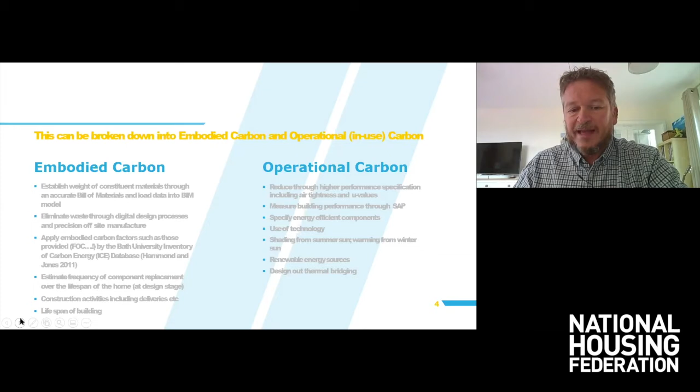These are net zero carbon in both embodied and operational terms, to be a whole life carbon positive and energy positive with zero waste project. The carbon positive is to be achieved within 15 years, to provide a cost neutral solution to sustainability, and to provide zero waste in construction. And the next slide, please.

There are lots of well-considered resources available to help. RICS have published a methodology for assessing whole life carbon, which can be used with your consultants. Now the next, please. The RIBA 2030 challenge, which I mentioned earlier, is a document with lots of advice. It can be used by you and your consultants, and it's strongly advised that it's used very early in the process from RIBA stage 0, as mentioned previously.

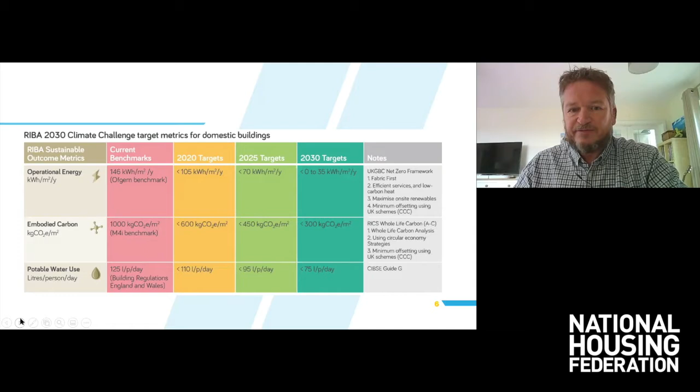The next slide, please. So the UK Green Building Council has a definition that fits perfectly with MMC methodology of design for manufacture, assembly, and I add disassembly in there, and that's where the circular economy comes in. It's when the amount of carbon emissions associated with a building's embodied and operational impacts over the life of the building, including its disposal, are zero or negative. That's the UK Green Building Council definition.

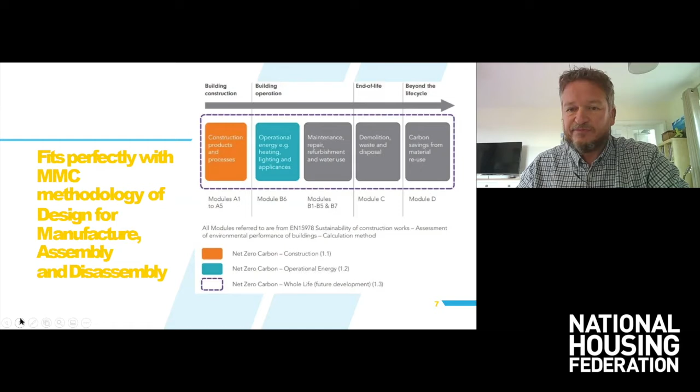If an airtight house is the option chosen for delivering new homes, then there must be an MVHR system. This control of ventilation is vital to maintain healthy air quality. However, it brings in some issues, and for example, relying on residents to manage the maintenance of the system is perhaps unrealistic. So companies such as Etopia have worked with partners to develop smart technology which will automatically send information about the system to asset owners. This informs part of the scheduled maintenance regime and eliminates costly unscheduled maintenance visits to identify the issue and then go back and fix it.

Other ways technology provides a tangible benefit is to control the ambient heat in the home through monitoring and then evaluating the best solution to resolve issues, such as solar gain, by operating smart blinds on the window. And the next slide, please.

There are numerous reports on achieving best value through different procurement models, including the excellent Procuring for Value from the Construction Leadership Council. This particular report was published in 2018, and many others over the past 30 years have repeatedly stated that lowest cost is not the only metric. There should be a balance of key performance metrics.

At AnyOffSite, we help you see the benefits of early engagement. I hope you can see what I've done there. The social benefits of the project and design and proposal. The economic benefits of the design. This includes methods of aggregating demand, such as Building Better or being part of the National Housing Federation. Then look at the environmental benefits of the proposed design.

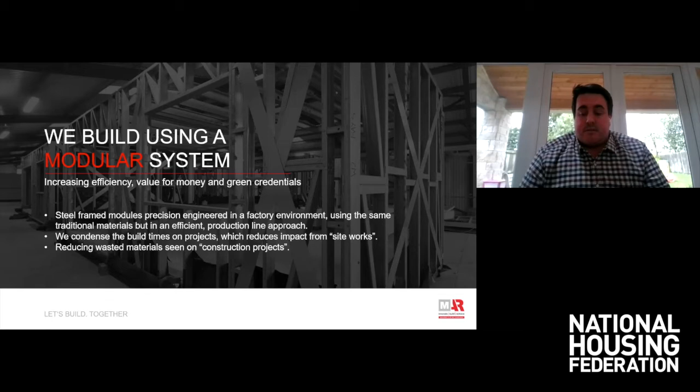We are commonly working within the market sector to reduce wasted materials, wasted labour, wasted effort, and that's something that's quite synonymously seen on some construction projects where some of our techniques are not developed and constructed. So we feel that the push towards a more sustainable future requires quite a sizable change in attitude, and that's something that we are now starting to see coming to the fore more and more year by year.

The built environment plays such a pivotal part in all of our lives. There's not one person in the world who's not touched and changed by the built environment, and sustainability needs to be at the forefront of what we're doing. Many local authorities, registered providers, and even private enterprises and PLCs have established quite large net zero campaigns, many of whom have also mandated climate emergencies.

And we feel that there's a real almost feel of carbon guilt within the marketplace and in general consumer behaviour, where everyone is a little bit more concerned, particularly over the last few years, as to the legacy that we're going to leave for future generations. The tide has truly turned. The UK government is backing increased targets for both housing supply and carbon credentials, and those things need to come together hand in hand. It's not a solution that can provide an answer to only one of those challenges.

And we've got to remember as well that affordable housing stock remains a key part of the social economic fabric of the country too. Truly affordable housing has to be linked to wages and growth, and we need to try and find ways as a construction industry to deliver more at scale to bring those barriers down. And obviously the way we are living and working in the built environment is changing. The last 6 to 9 months have been quite a seismic shift in how we are all spending our time, where we're spending it, and what we're doing in the built environment.

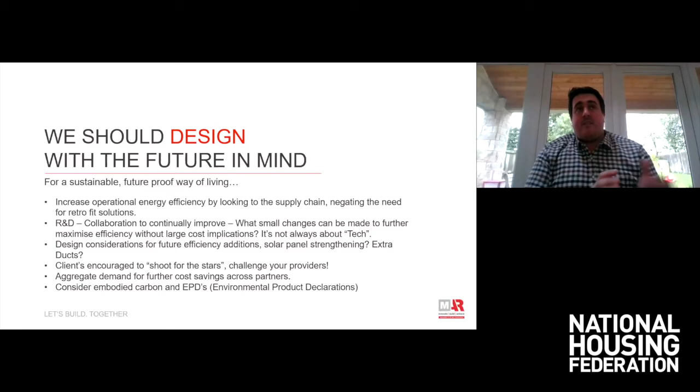And I feel that this is an area of MMC which is going to really take off in the next couple of years, when we start talking about not aggregation of separate products, but physically getting common and firm data about the environmental product declarations, to tell us, from leaving the threshold of the factory, what are we in for in terms of embodied carbon and what's the future looking like?

MMC is now a tried and tested approach. A few years ago, it was very difficult to identify things that chimed along with the current rhetoric. But now there are numerous providers in the marketplace, all offering different products and solutions, but all with a common interest in mind: to increase productivity, material performance, and ensure that the builds last the test of time. We can name some of our projects in that mix too, and there are also other fantastic providers out there who can really help you achieve your goals.

If we started from first principles, what is a home and how would it be best to be built? We're often clouded by the common and historic ways of doing things, but if we had to sit down with a fresh piece of paper, taking lobbying and things aside, how would we do it? And it's great to see some of those companies starting to come up with those good ideas, which we class ourselves in that sphere. We need to get to a point where we've reduced carbon footprint, made processes more efficient, realised cost savings for customers, and made sure that those result in lower prices.

We've got to foster continuous improvement, which can only be done together. There's no point in a product or a system working if it doesn't complement the entire ecosystem. And we need to offer new opportunities to people looking to develop their skills and build a life. There's a growing skills shortage in construction, and we need to find ways that we can foster and bring forward, in controlled scenarios, new trades and new skills emerging to the marketplace. Never underestimate the importance of working with good people who can help you achieve those goals.

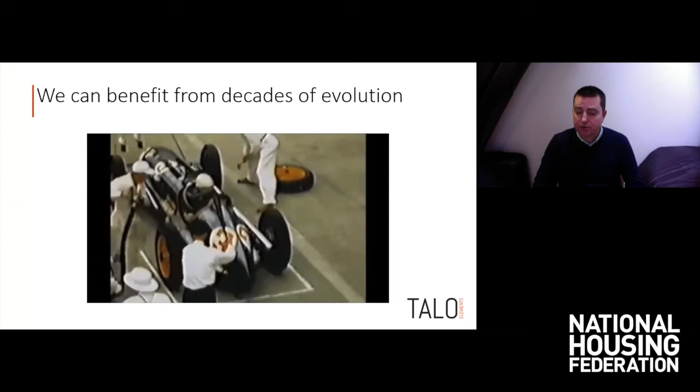So this is a video of a pit stop from the 1950s at the Indianapolis 500. It's quite interesting to look at. A car comes in, they're doing a couple of tasks. They're changing wheels, just two, putting some fuel in, and doing some other bits and bobs. I've sped the video up because it takes quite a while. In fact, it takes 67 seconds just to change those tires. And you look at the guy hammering away with a hammer on the wheel nut. There's only one guy taking the wheel off, putting it back on again, dealing with the wheel nut, going around the other side. So they're achieving the same end.

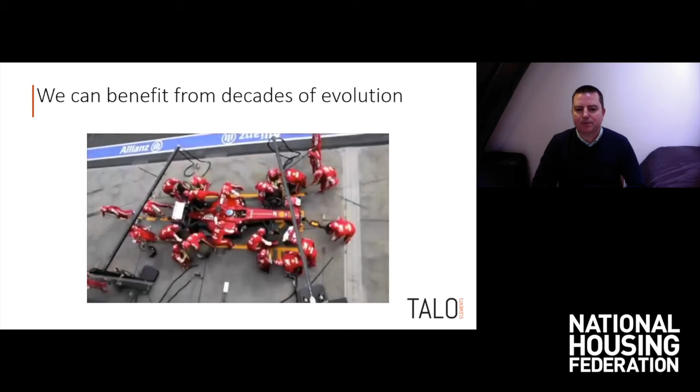But you look at it now and think, ooh, you could do that better, couldn't you? But you'd have to look differently. You wouldn't just hammer faster. You'd have to change the way you do it. Let's now look forward to 63 years later. Melbourne, same job. Done. And I think this is really analogous to the opportunity we have in front of us. It took Formula One 63 years to go from 67 seconds down to 2.

Now put that in the home construction world. Well, actually, this evolution has been going on. For example, our factory has been evolving, developing and refining how we can build homes to a better quality, faster, at an economic price for 40 years. And we now in the UK have opportunities to really benefit from that.

So if I try and move on a slide, rather than show you that video again, we'll look at another little video. And this one is of a project we've recently done up in Yorkshire. So our homes are built in our factory in Finland. We bring them over flat packed on a truck, and then we install them. So let's just look at this together. And you can start to see some parallels, and it poses some hopefully useful questions.

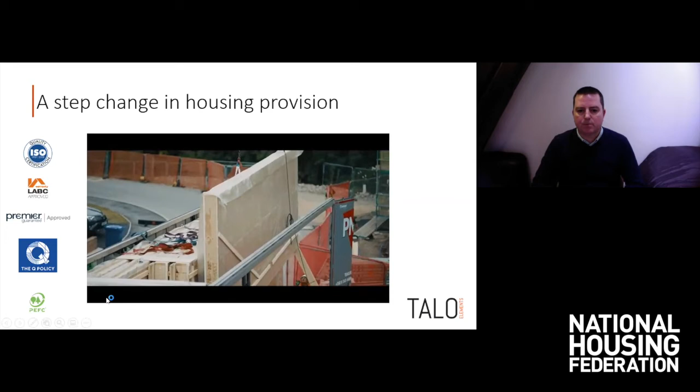So this just happened to be an example of just 17 homes. And the walls are lifted off the truck, all in order, and placed directly onto the foundations, which are ready for it. And they include from the plasterboard all the way through to the external finish, if it's something like wooden cladding, or you can have bricks or render put on locally.

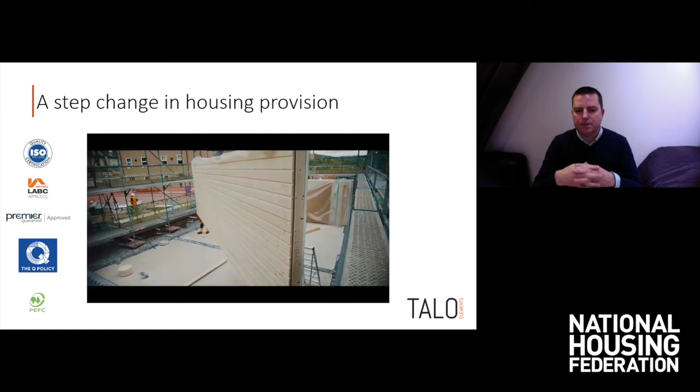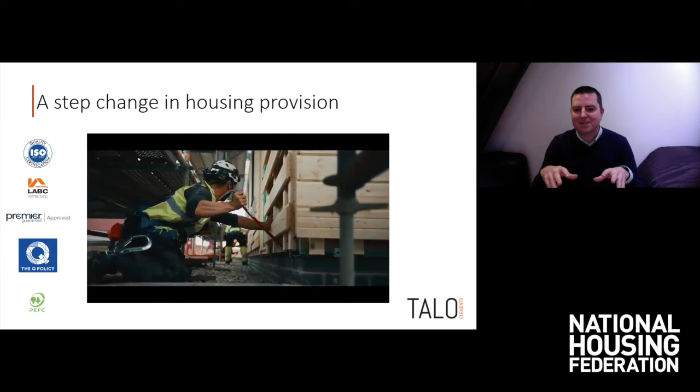But some things to take out of this that are quite analogous to the Formula One team. Everything is quiet. There's no need to be shouting about what we're doing. Everyone knows exactly what we're doing. The guys are highly trained. It's actually very, very calm. And it appears, especially in this video, as slow. But each one of these semi-detached homes took 1.5 days to assemble to a watertight state, with the windows in, the doors in. It's massive efficiency gains.

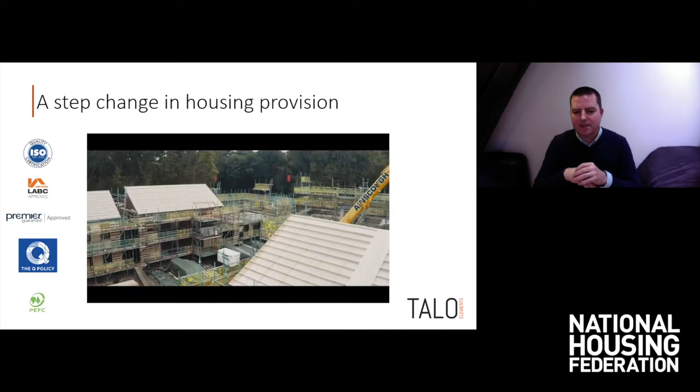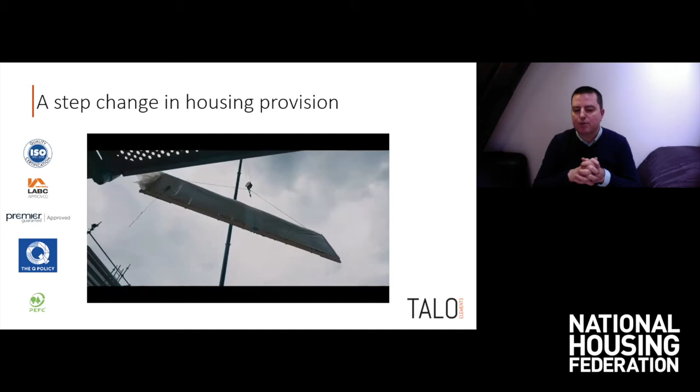And those efficiency gains then allow us to keep going to the goal. What is our goal? Well, higher quality, so every window is triple glazed, every door is low energy, and the house meets or exceeds passive house standards. And there's no reason why we can't do this today. But it does take that change of thinking. It's not hitting the wheel nut harder. It's saying, actually, what's a better way to remove the Formula One tyre or wheel and replace it?

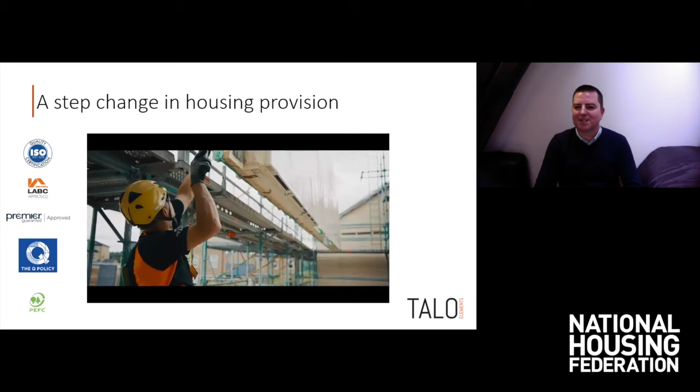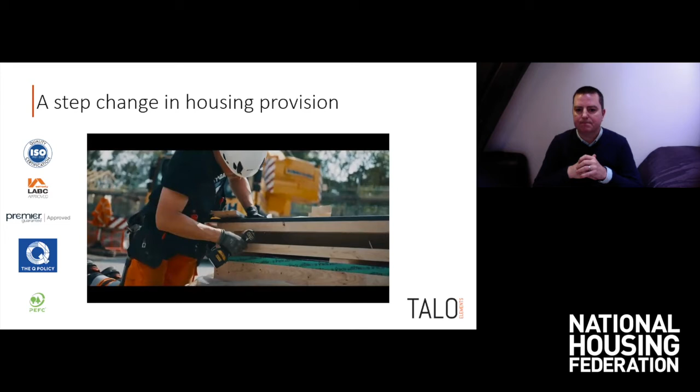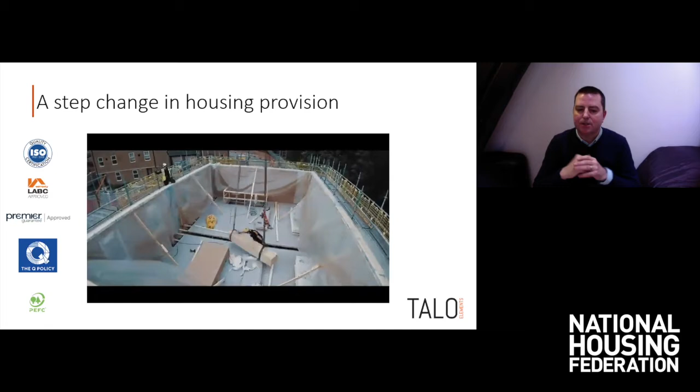Is the team different? This team here is two gentlemen who are highly trained and a crane driver, who do the full house installations, rather than a cast of many without clarity on exactly what they're doing, nor necessarily the expert training that they require. So I find it hugely exciting when I see these projects go up that deliver houses which are really very airtight, built in at the factory. So actually the job on site to make them airtight is quite low. It's not an aspiration you're chasing, it's just the way you work.

So this fabric here puts you in a wonderful position. You've now got a super low energy structure, almost you can consider as your base camp to carbon zero. So I'll try and forward this on. And this harks a little bit back to what Ryan said. If you're looking at a traditional UK built house, many built to current building regulations, the challenge to get from there to a carbon zero target is actually quite a large challenge.

If you set your challenges out right from the beginning and your goals, motivations, and aspirations are well aligned to what you're achieving, and maybe you put in a fabric of the type that we provide, the challenge to get to carbon zero is actually quite small. It's very achievable, and it's achievable today with today's technology, and that's what we do. And I'll keep coming back to this theme of this needs to be done as a team and partnership with shared aligned values, goals, and objectives, right from the beginning of projects.

But to get there, is it worth it? Well, the motivations, I believe, touch all stakeholders. So for the occupants, we're now providing homes to sections of society where you can say, okay, here's the housing we're providing to you, you virtually have no heating bills and electricity bills forever. I think that's massive. Eradicating fuel poverty in a single sweep for those individuals who get to come in the homes you're providing. The landlords, greater certainty on rent payment because there's more money in the hands of the people who are renting. Local communities, more of that money then goes into the local community circulation, bringing that extra support to that area.